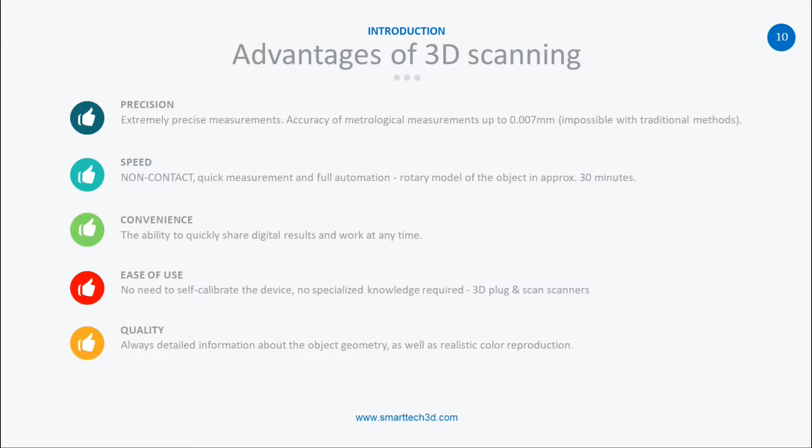With our newest solution, the robotized SMARTTECH3D Robotized, you actually do not have to touch it at all. Just place it and the scanner will scan it from all directions by itself, automatically. It's really easy to use. All of our scanners, and the software we are developing, are focused on being really user-friendly, so you don't need any additional advanced training to use our products.

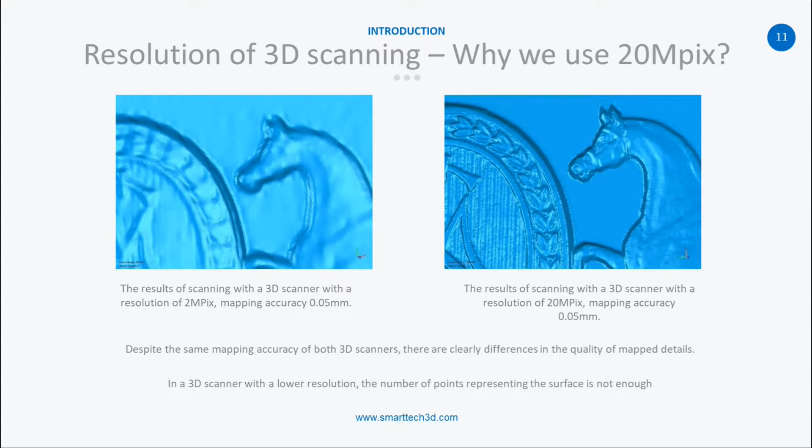It's gigantic. So every time you want to have a really good image that you can use in many different ways, in reverse engineering, in archiving, in digitalization, you have to reach for the highest resolution that is possible. Here also you can see a little bit more from the industrial side, the importance of the resolution.

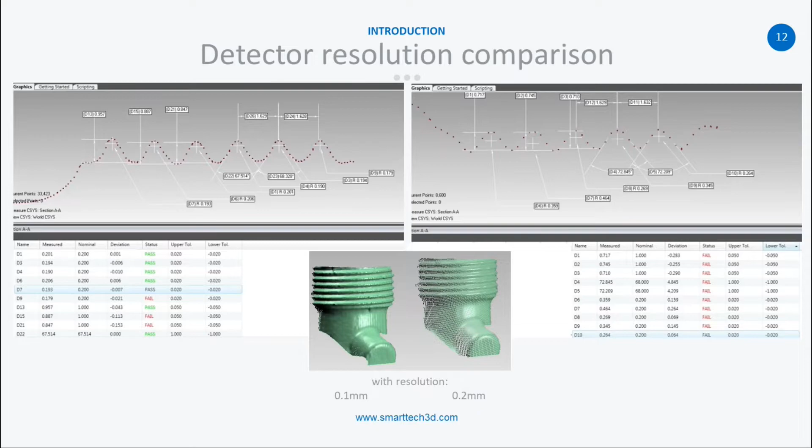Jumping to our products, briefly about all of our devices: we can split them up into industrial and non-industrial applications. For technical applications, we have our main product, our first pride up till now, Micron 3D Green Stereo.

It uses green LED light and provides the highest resolution possible with double 20 megapixel cameras. Our SMARTTECH3D Universe is a more budget-friendly option, also smaller in size, so it's possible to travel with it on the plane, for example, if needed. This one is able to capture color.

And our Micron 3D color scanners, this line with smaller or bigger resolution, can be applied both in industrial and non-industrial applications. It's a favorite for archaeological applications, for example, for museology, because here also we provide the highest resolution with 20 megapixel cameras, and it captures color. The data from this scanner you are able to use for archival purposes, so it's another purpose of the scanner.

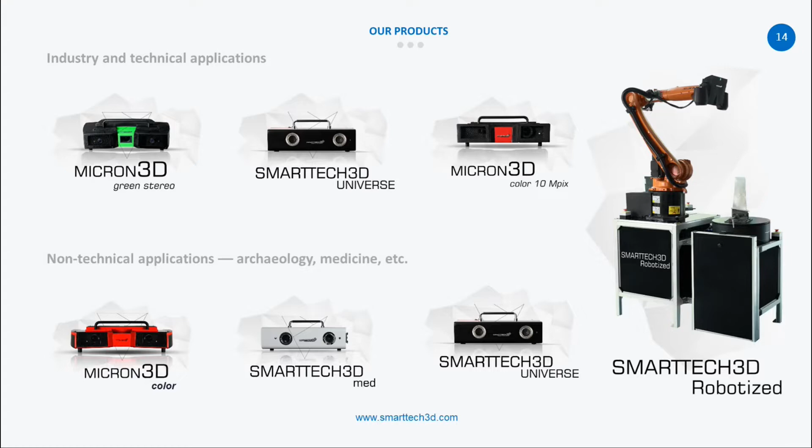And the star of the meeting, SMARTTECH3D Robotized, the newest solution that we invented. This is the solution that is meant for further automatization. It is completely touchless, non-contact measurement. You just place the object in front of the robotic arm.

The solution has a scanning head placed on the robotic arm, and with advanced algorithms that you can set up in the software that is also provided with the scanner, the robotic arm will be scanning the object from every possible direction by itself.

You will see in part of the presentation the robot just going by itself and making all the scans around. The resolution available on this scanner is 20 megapixels, and it's possible in three measuring volumes.

The smallest one is 200 by 300, up to 400 by 600. So you can choose which size of an object you need. If you have a bigger one, of course a bigger volume of field of view is required, so the scanning will be faster.

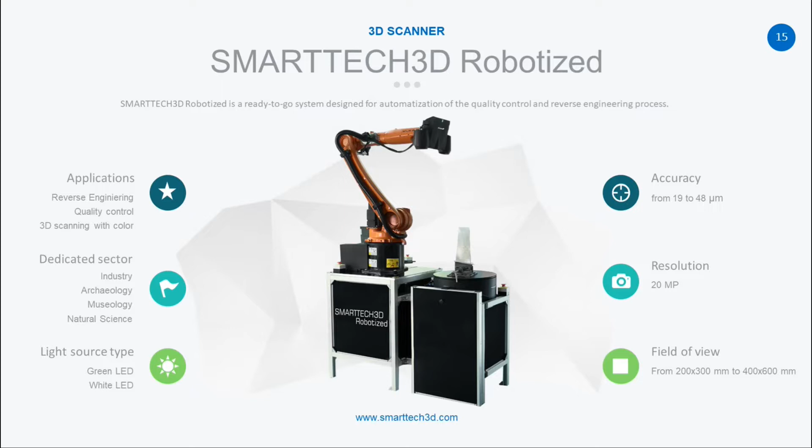Whatever is in need for such a solution, it's especially helpful with stuff like reverse engineering and quality control. Here's a little more about application. As mentioned, you are able to automatically make colorful 3D models with RGB color registered, and every point has its own information about the color.

It can be used for many purposes, from 3D printing or visualization up to archiving. That is really strict, with a lot of rules, and we fit them all. In Poland, we follow the list of rules for museums that they need to meet to make archival documents, and we follow it to be sure that we fit.

Reverse engineering, automated, really easy to make. You don't have to go through advanced training to be able to work with the software and with the scanner. That is really high technology on a robotic arm, quality control really fast, automated, digital storage of data.

Now as industries and factories are bigger and bigger, they need bigger space for producing stuff. The space they can store information about the item they are producing is smaller and smaller. So there is a tendency that a lot of industries are going with storage of the data in a digital form, and it's actually a great idea.

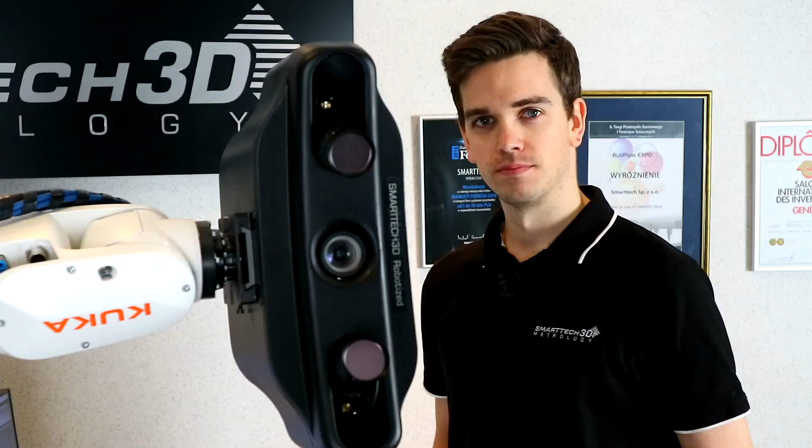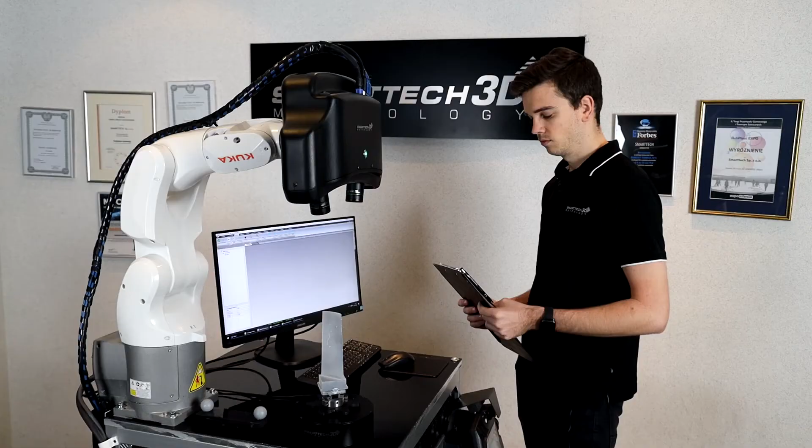Please take a look at the scanning station. On top of the control cabinet, you can see the KUKA robotic arm, master ball bar and rotary stage. Inside the control cabinet, there is a computer operating the scanner and the KUKA controller. On the robot, there is our newest scanning head, SMARTTECH3D Robotized. It is a scanner with two 20 megapixel detectors and a brand new projection unit.

The main application of the system is automated quality control. In short, the operator puts the object on the rotary stage and then in our software selects the measurement plan and clicks start. Before scanning, the operator can check the accuracy of the 3D scanner by scanning the master ball bar, and then, if necessary, perform an automated calibration process.

The process looks like this: the operator puts the calibration matrix in front of the scanner and the robot is automatically moving the scanner to a specified position and capturing the calibration image.

Now I would like to show you some workflow, how the automated quality control looks like. So at first we have to create the template in the template manager.

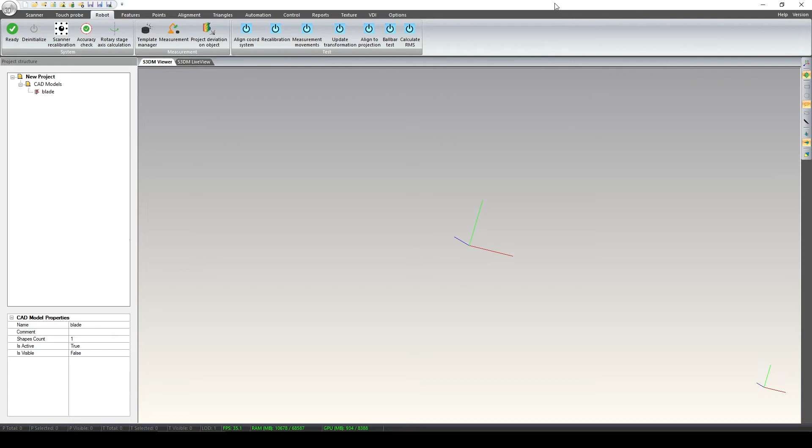So I will make a new template. And now I have to add for this object the position, offset in axis X, offset in axis Z, and the scanner rotation. So we've got the first position, now the second one.

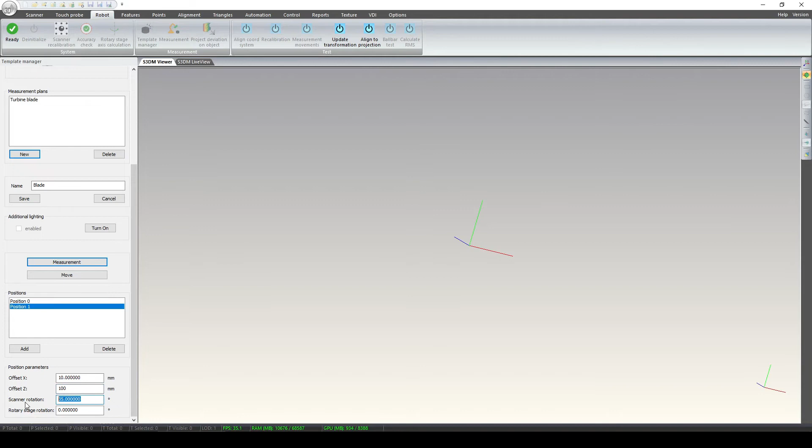And now that we've created the measurement plan, we can create the 3D compare template. So by right-clicking on the CAD model, we set it as reference and we've got a template of 3D compare. Here we can change some parameters like number of segments, nominal values and critical values.

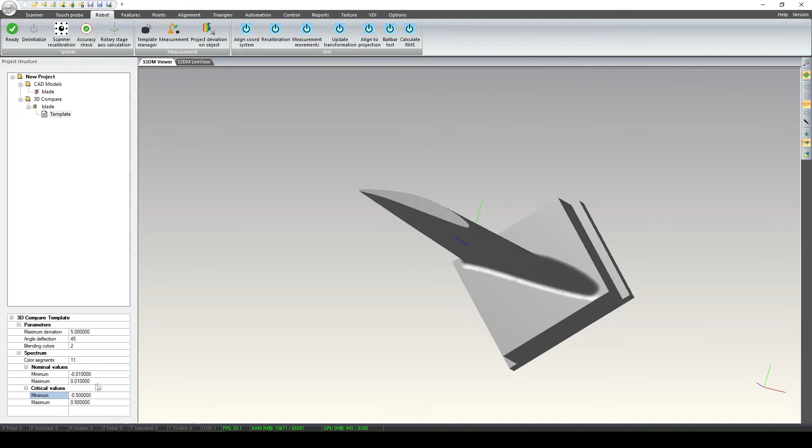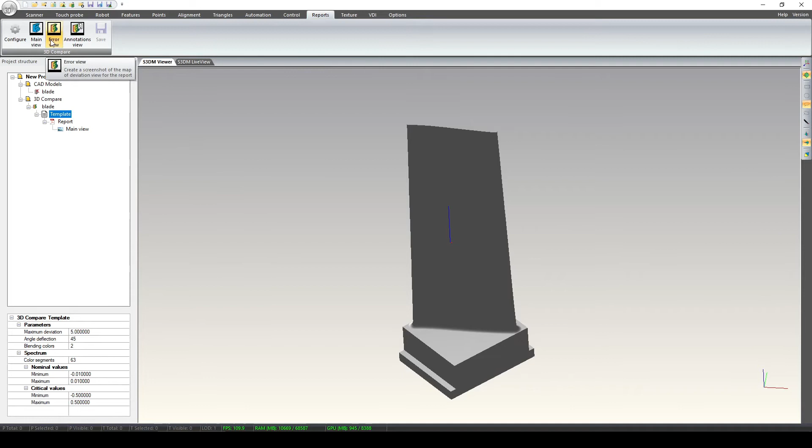Now it's time for creating the 3D compare report. In the report tab, we can add some screenshots, for example the main view of our comparison, some screenshots of the error views, and at the end the annotation view.

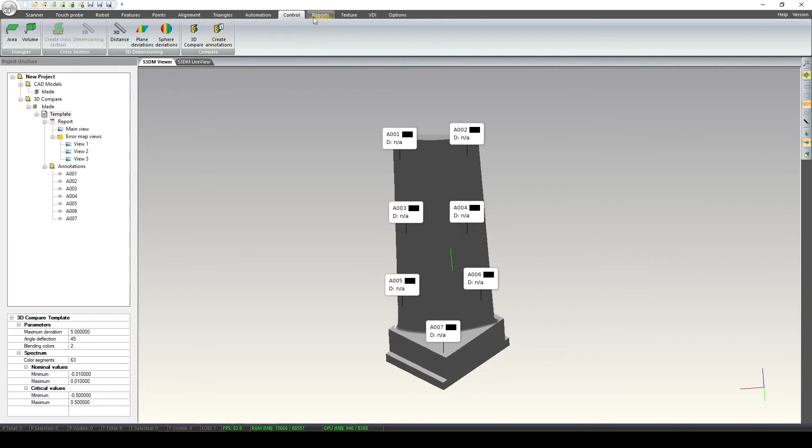To do this we have to first create some annotations. Just by clicking the left mouse button on specified positions, we select the places where we want to create the annotations, and now the annotations from the second side.

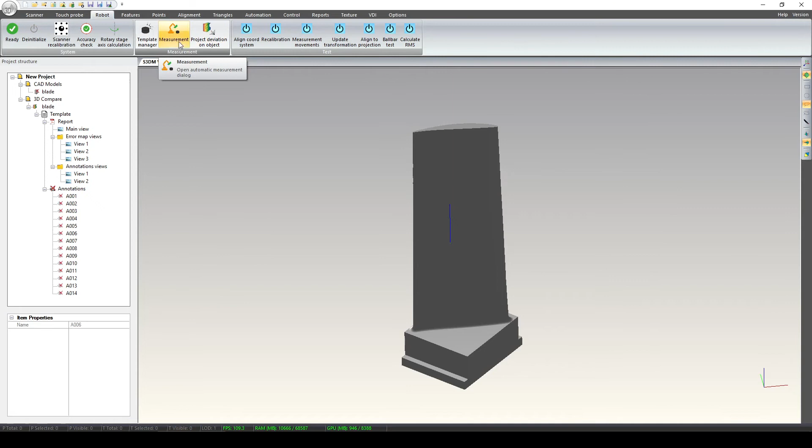And the annotation view. Now, when the 3D Compare template is ready, we can go to the Measurement tab and perform the full scanning process. From that list we select the blade template which I created before. Here we select the rotary stage parameters, so range of rotation 360 degrees and 60 degree step. Here we select automatic control and the reference which we created before.

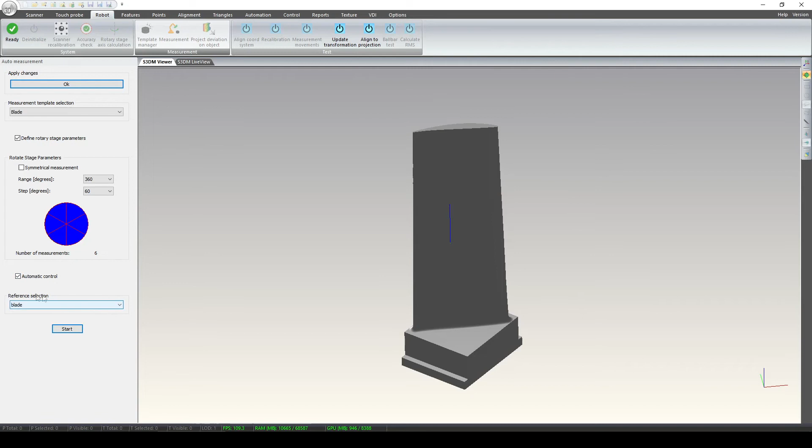And now, after clicking the start button, the robot will move automatically to the position and the scanning process will be automated. So here you can see the scanning pattern. The scanner is projecting the fringes. It is our measurement sequence, and then the rotation of the rotary stage.

Please take a look how fast the scanning is. It takes about 2 seconds to capture a single scan, and now this process will be repeated 12 times.

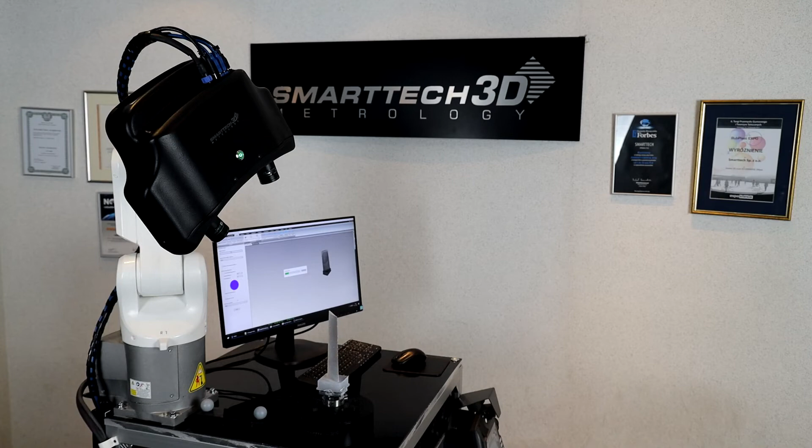As you can see on the screen right now, the scanning sequences are running. It's going to be 12 of them, as Karol told you during his part of the presentation. What you can see on the screen is the scanning head that is using green LED light, so for industrial application you will see the effect in a really short time.

I just wanted to add, while we have a little bit of talking space watching the scanning process, that there is also a possibility to use a scanning head with a white LED light source. So any application that requires colors, as I mentioned before, can be applied and used for.

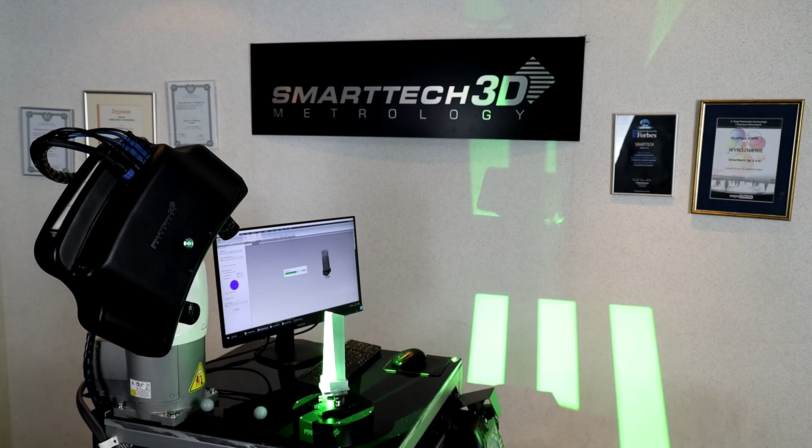A lot of museums and universities are asking us and connecting with our company, asking about the solution for making all the documentation and digitalization faster and easier, especially when you are working with items that are pretty fragile and you cannot touch them constantly — it's harder to make such documentation.

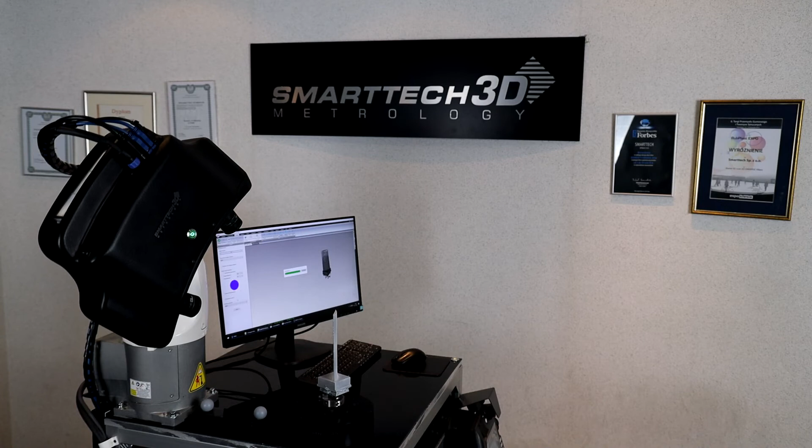In archaeology or museums and universities, to make documentation you need to take the item and traditionally draw it down. So to draw something, you need to take it and turn it in your hand over and over again. With the scanner, that's eliminated — as you can see on the screen right now, it's just scanning from every direction by itself, and you will see the results on the screen here without color, but the color application is also available.

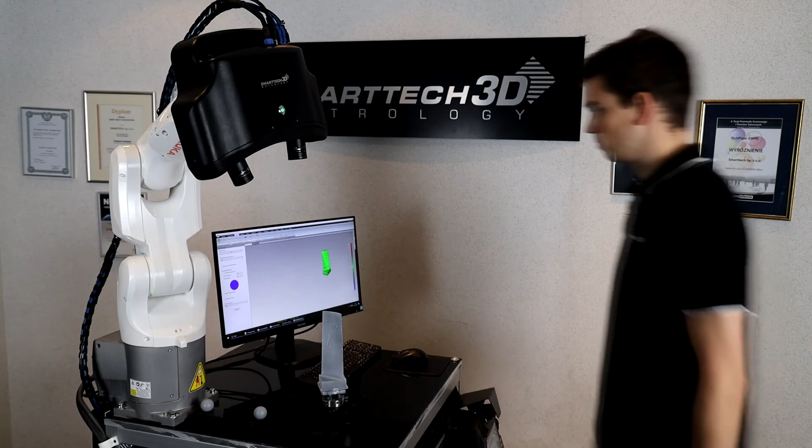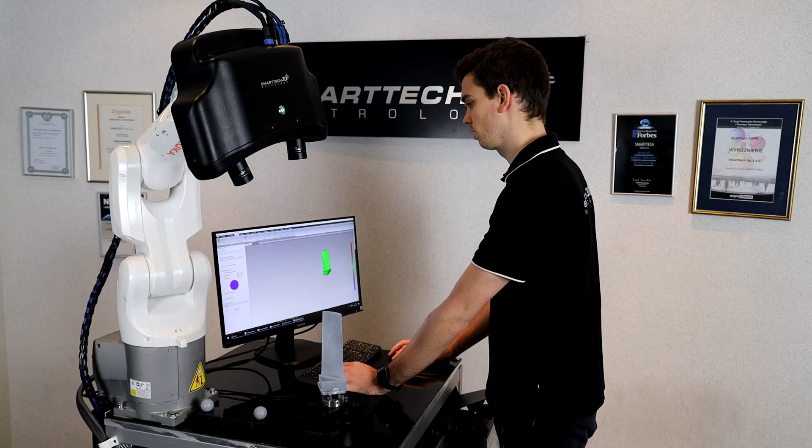Okay, so the scanning process has finished, so I will show you the results. I'll leave the measurement tab, and the robot will go to the home position. Please take a look at the results.

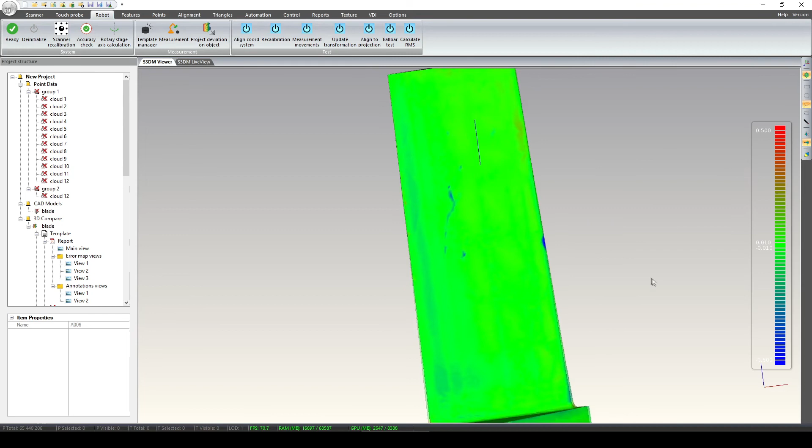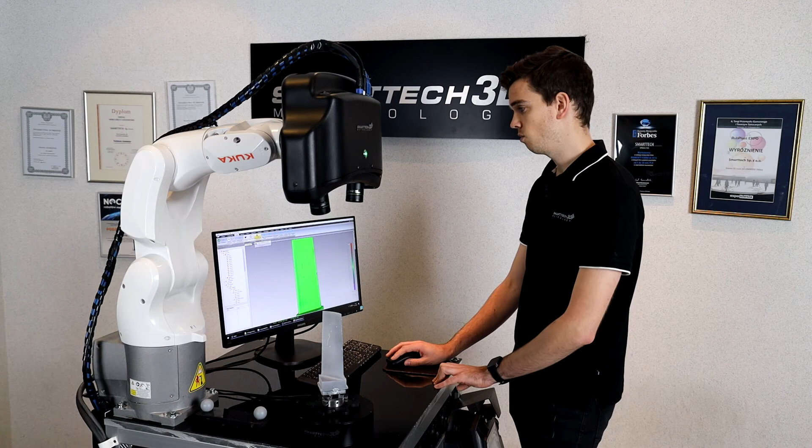On the 3D Compare map, we can see every scratch, every defect of the object. And now I will show you the feature which makes us unique: the projection of the color map of deviation on the object in real time. So we just click the option for projection of the color map of deviation on the object, select the template from which we want to project that map, and click the start button.

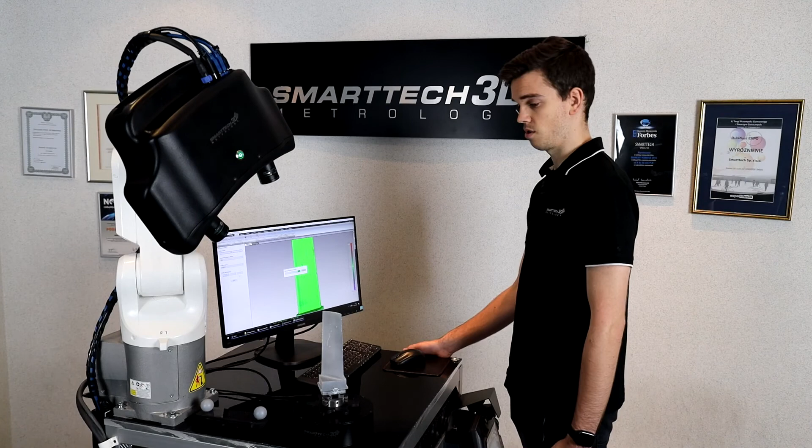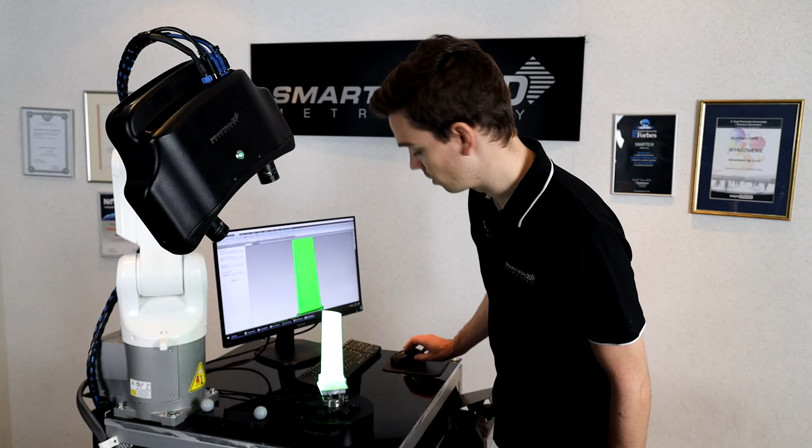And now the robot is moving to the selected position and makes a single scan, and after that the color map of deviation will be projected on the object. So you can see here live the color map of deviation projected on the object, so we can see if there is too much or not enough material on the object.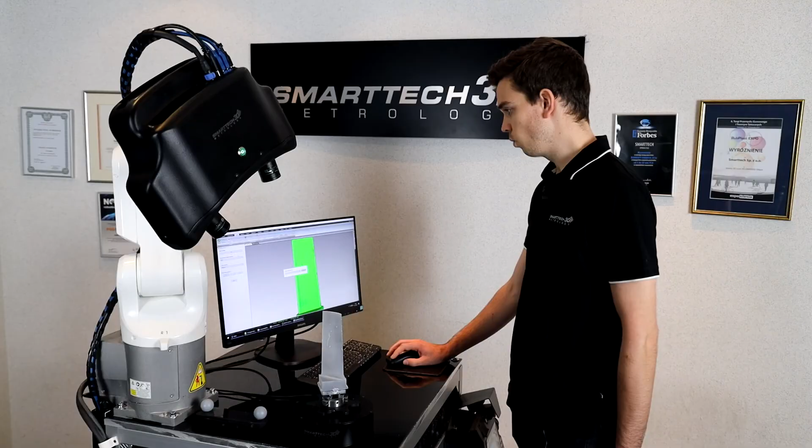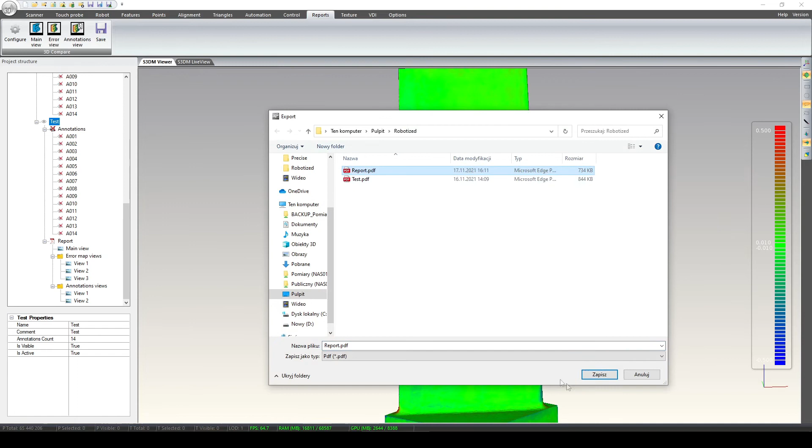So after that we can save the quality control report. By selecting the report from the project tree and clicking the save button, we can save it as a PDF file, and then open it.

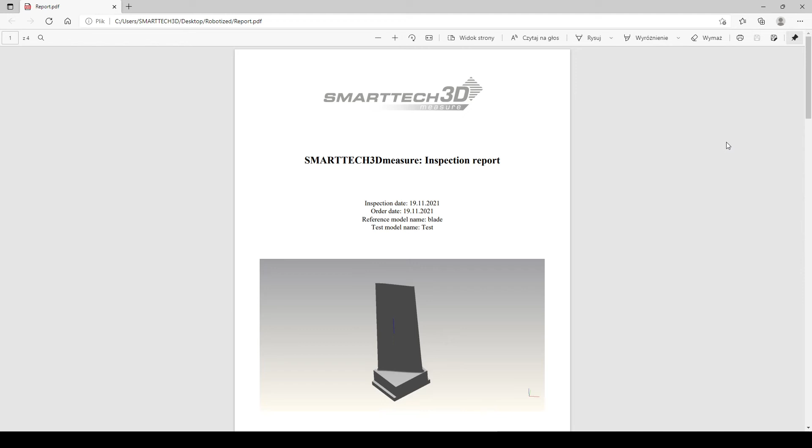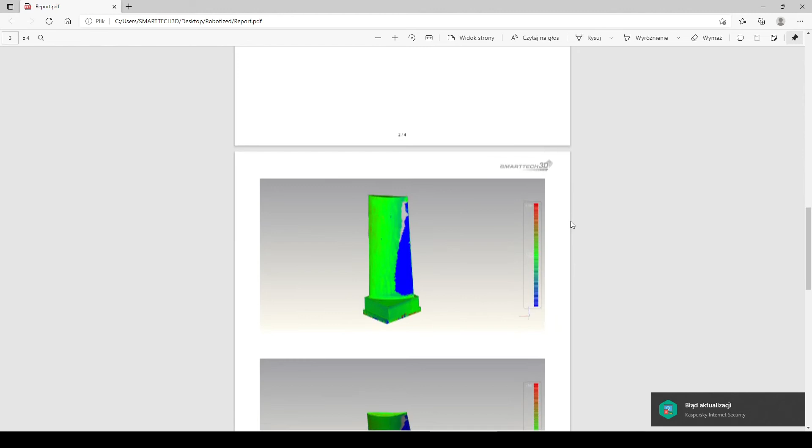So here you can see the results, the inspection report from the SMARTTECH3D measure. We've got the inspection date, order date, and our main view which I created before, the inspection results as a deviation map view. We've got the RMS value, minimum and maximum values, and average plus and average minus deviation. After that we've got the error map view and annotations view with a table in which we can see the deviations.

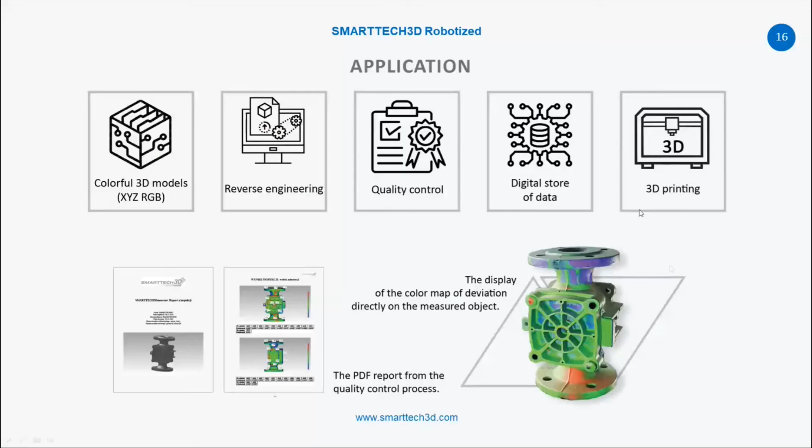As you saw in the presentation, everything that I told you before looks just like it in real life. You just click really easily in the software, you set up everything that needs to be done and just click a start button, and the robotic arm moves the scanning head all around the object, making a scan from all possible directions.

Our SMARTTECH3D measure is the software that we developed, as I mentioned before. It's software that we really wanted to be user-friendly and intuitive to work with, but at the same time we wanted it to be really powerful, and we achieved that — the software is able to work with a huge amount of data all at once. You saw in real time the time needed to create a model, to make a point cloud.

So the software can process a lot of measured points at once. Also, you saw that we do not use any special workstation in terms of computer power, so you don't need anything aside to connect your laptop to be able to work with our software. You can just have a regular gaming laptop, as we all use here in SMARTTECH.

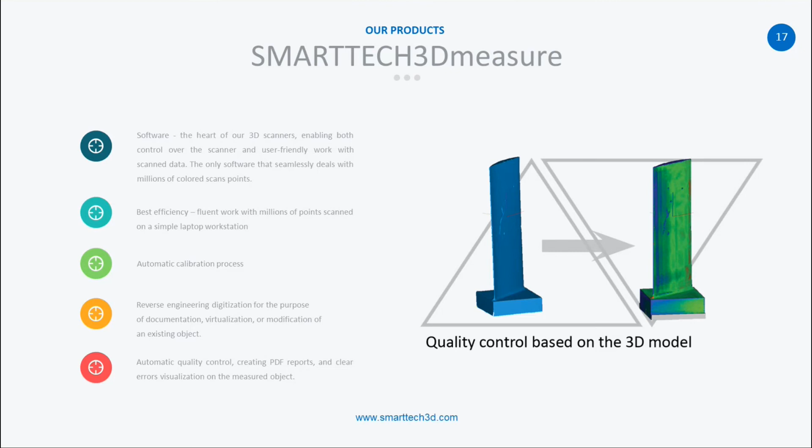So any changes needed to be implemented on the model, you can just project them, and you will see on the object where all the changes need to be done.

Because we are the producer of the scanner, we are able to make a lot of customizations and apply them to our scanners, especially now when we have in our devices family the SMARTTECH3D Robotized solution. So we expect a lot of implementation of such solutions for reverse engineering and for quality control.

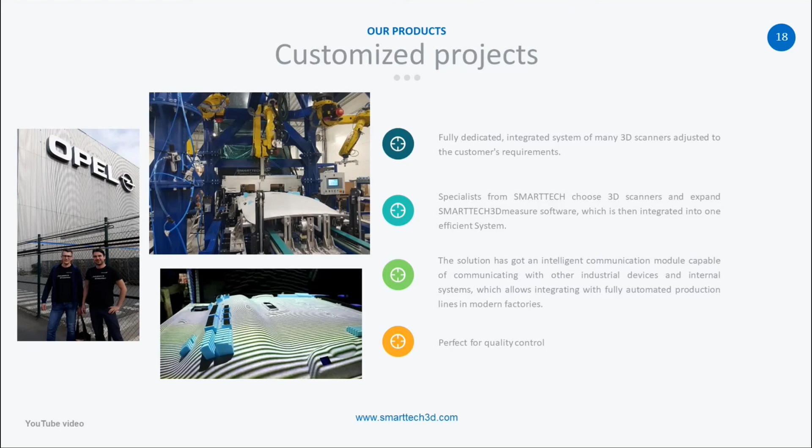And as we know, every project is a little bit different, and sometimes there is a need for making special customized features in the software or on the scanner. Because we own the technology we use, and we produce everything from the beginning, from the start, we are able to make all kinds of customized projects as needed. All you need is just to reach us, and we will talk about it.

Besides customized projects, of course there's regular use of our scanners for reverse engineering, quality control, but also digitalization, archiving, and visualization. We also provide trainings, not only for our distributors, but for everyone who is purchasing or owning our scanner. We really want the experience to be really good, and the results to be the best possible, so we focus hard on the training process for everyone who owns the scanner.